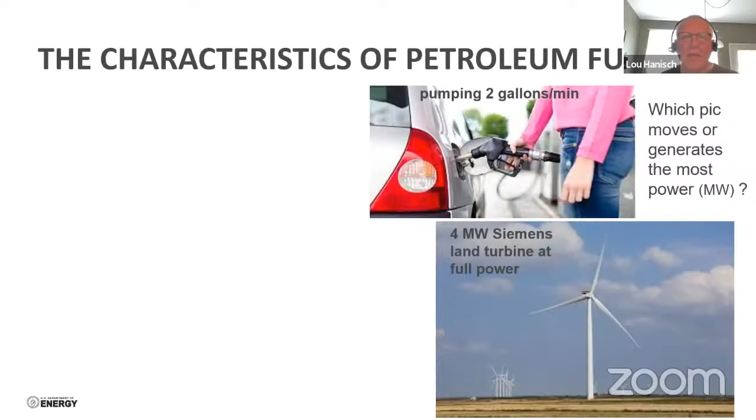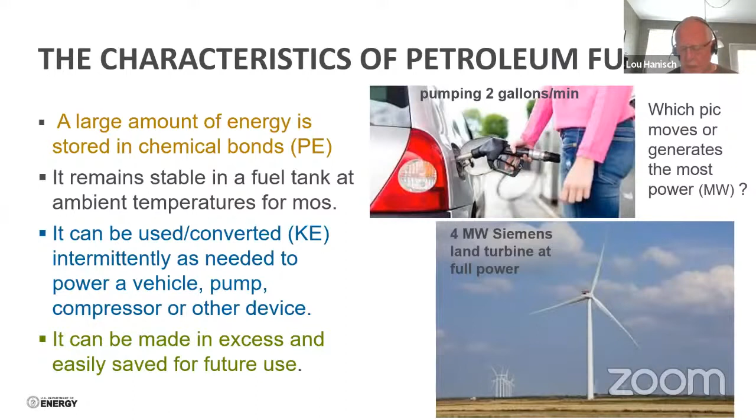The reason I was interested in this talk is that we're all getting pretty familiar with small batteries in our cell phones and various things around the house. They're very practical, generally pretty safe, not very expensive. But big batteries for intermittent energy are a challenge because to have sustained energy stored for a period of time, given our fascination with wind and solar, it would require fairly expensive and novel technology to provide this energy over time. I think Lou has covered that complex subject very well in what I've seen from his handouts.

And that would be the woman. She's well over, she's like at 4.4 megawatts of power that's actually moving from the gas tank underground to her car. Now that's a slow pump. I mean, you could almost double that rate, so she could be almost double the power of this big land wind turbine that you see.

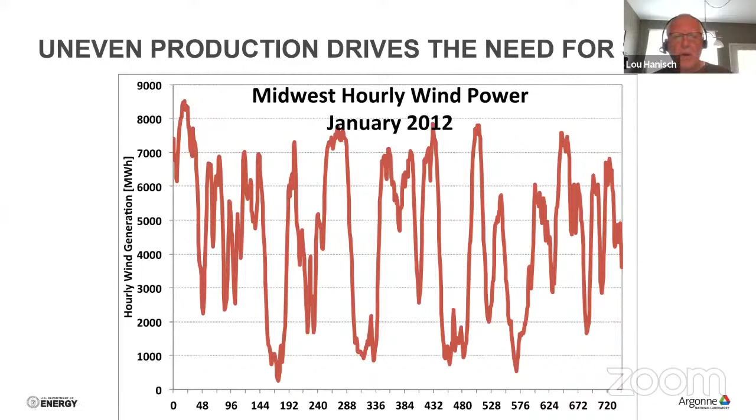So what that tells us is petroleum really spoiled us. It gives us a tremendous amount of energy. We can store it. It's stable. It doesn't disappear on us. And we can convert it intermittently to the power that we need in whatever we want to run, if it's a vehicle, a pump, compressor, some other device. And we can make it in excess, okay, and store it. It really has its own built-in energy storage.

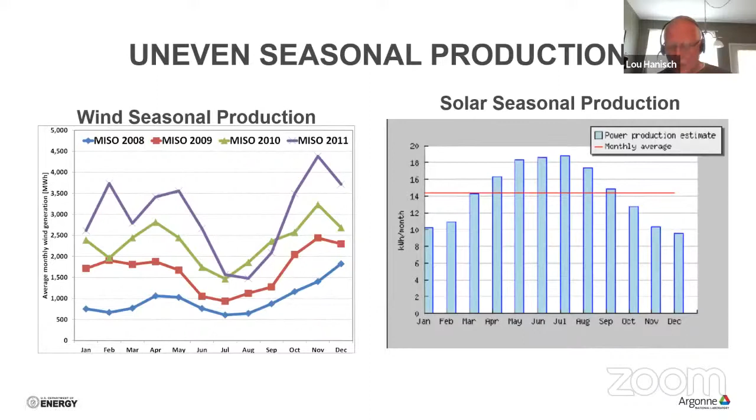The big thing we have to remember, and we've heard this in many other presentations, is that the electrical system works by supply and demand, production and consumption, and it has to match every moment. You cannot have one out of sync from the other. It just doesn't work. It's remarkable that you flip on a switch and somehow we fire up some device at home and it stays in sync. It's just remarkable how the grid operators make that work. And we're doing it without very much stored electricity. We're just somehow making it work. It seems magical.

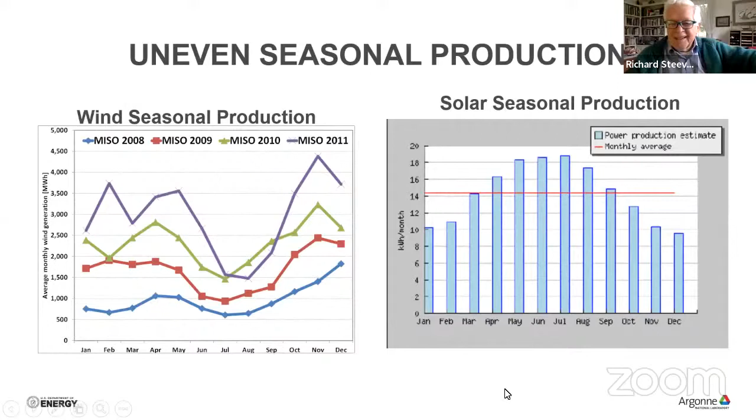But as Richard indicated, as you start to bring in renewable energy, this gets a little more dicey. It's harder to do. We want to stretch this timeline, and we want to energize these electrons. Can we put them in a bottle, so to speak, like a genie in the bottle? Well, in one form of storage, you can do that, but that's not what I'm going to talk about.

Supercapacitors can do that, but they don't really help very much. They don't have very much energy, and they have a lot of downsides, but you will see a little bit about those. The one thing that we have to do is the second bullet, and that's we want to take a variety of technologies that collect energy or electricity at one point in time, change it to some form that we can store, and then change it back to electricity later when it's most valuable. And this is key, when it's most valuable. Every time you have an energy conversion, you will lose some of that energy. Laws of thermodynamics. So you're going to have two of these every time you're trying to go through a cycle, a minimum of two, when you want to store energy.

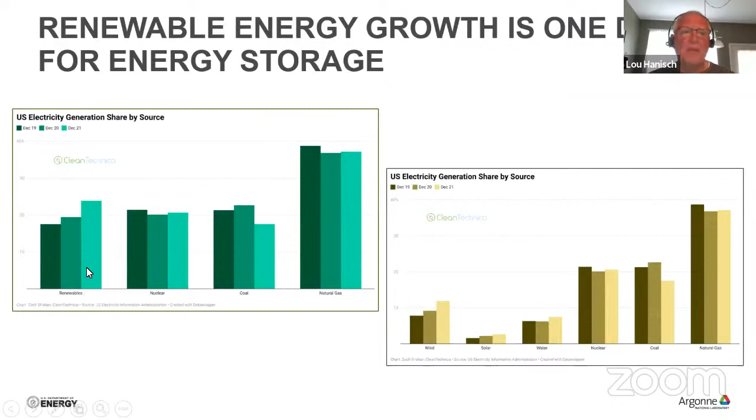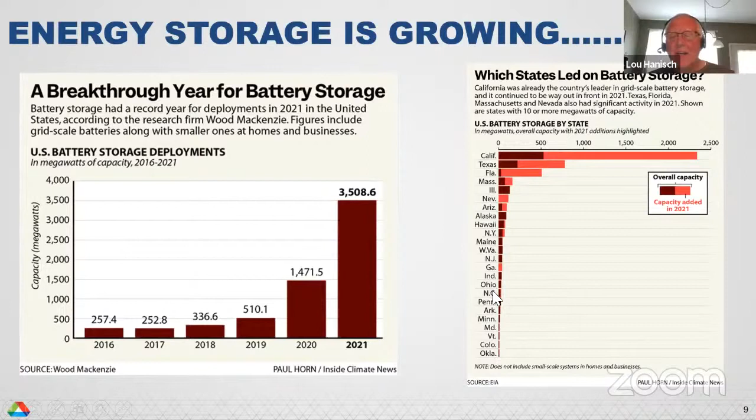Here's another graph just to show you the growth of renewables quickly.

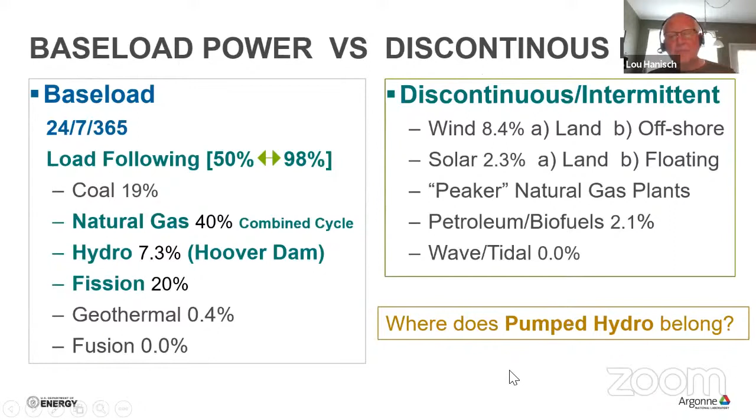Well, anyway, it's showing the erratic... There was a raised hand. I just want to make sure you gentlemen saw that somebody has a question in the chat. Oh, very good point, thank you, I sometimes overlook that. Let's see what Bill... oh, he asked what is MISO, and I just defined it, so that's okay. Okay, very good, stands for Midwest - I've forgotten what it stands for. I'm glad you knew that because I didn't know that. All right, okay.

But anyway, it's in the middle of the country, and it's a huge grid. It excludes only Texas, which is the windiest state, they say, but they've got their own special grid.

Okay, we're just showing this is December of 2021. This green graph is very recent, just a few months old, but it's showing renewables growing. Actually, renewables include hydro. So if you stack all three up, it will equal this, and the remaining ones stay the same on the other graph. Anyway, it is growing, and that's just what's happening. I'm just mentioning that.

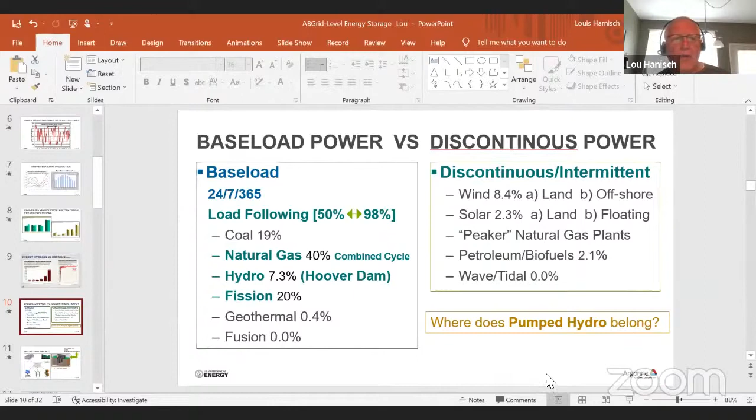Battery storage, look, that's growing too. And this is all forms of batteries, from residential up to grid bulk level. They went up in the last three years before this year, 7-fold. So this stuff is growing like crazy, and where it'll be in 2022, it'll be way up there, and who knows where.

This graph on this side, if you can see it, the red is showing the capacity that was added just in the last year. California, Texas, Florida, they're way up there. They should be up there. Nevada should be up there. But this is not including residential or commercial, it's just including utility and bulk level, or grid level.

I don't see Wisconsin on here. Where is it? I'm not seeing it. All right, this will change too.

Okay, now here's a graph that you guys all know. I'm going to just mention a couple of things about this, so that we are on the same page. On this left side, we have base load, 24/7, 365. It does not necessarily mean it's full power all the time, that gets into load following, and I want to park this one for a while. These percentages are percents in the US that are pretty current. Fission has held 20% for quite a while, actually. Coal should be decreasing, natural gas has probably picked up and taken up the coal.

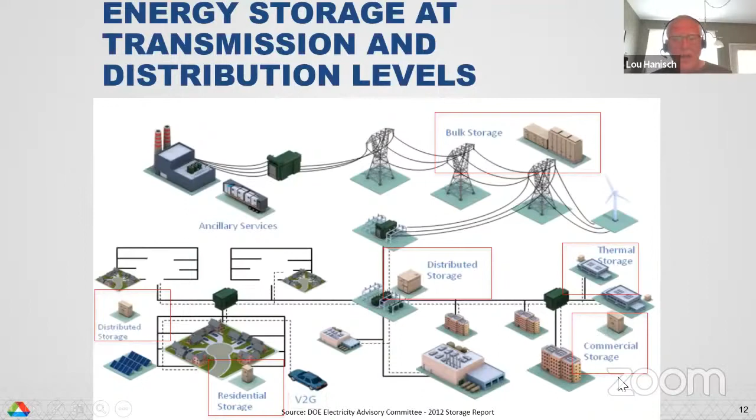What you just said applies very much to Hawaii. Hawaii has been using diesel generation for the longest time because they don't have very much solar, they're not interested in looking at offshore wind, and there's no projection for them to get modular fission reactors anytime soon. But I hope somebody convinces them, because that would be a natural for Hawaii. They need it.

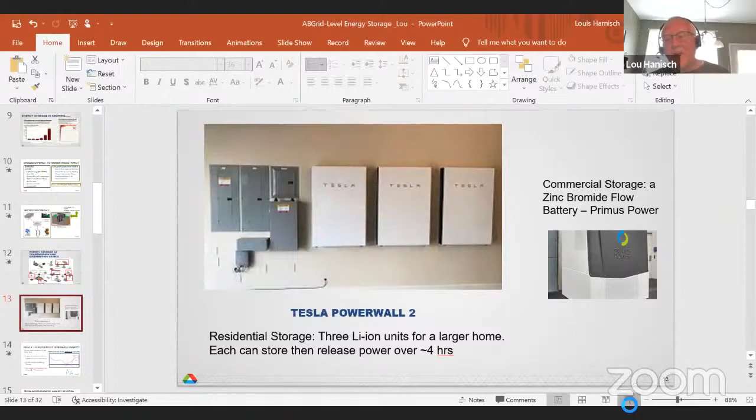I'm going to move up to the next slide, which is larger. We have a coal plant, and this plant is about on its last leg, so we're going to replace it with a Natrium reactor—that's happening in Wyoming. We have a substation that's going to change current for voltage and send energy down transmission lines.

And we have, I don't know if you can see, a windmill, that's renewable energy. Then we have another substation which changes the energy into a form that these users—whether it's a factory, hospital, or big box stores—can use, and they can put solar on their roof. And then we have a residential community here.

Okay, so this is sort of a larger grid in a microcosm. You'd need many of these to make up a full grid. But what's interesting is...

There are all these levels of storage that can occur here. Usually bulk or grid level is where you make the energy, whether it's renewable or sometimes even fission, or gas—they'll have a big facility, it's huge. Then we go into utility level here, which provides some backup, for maybe hospitals and other important facilities, government.

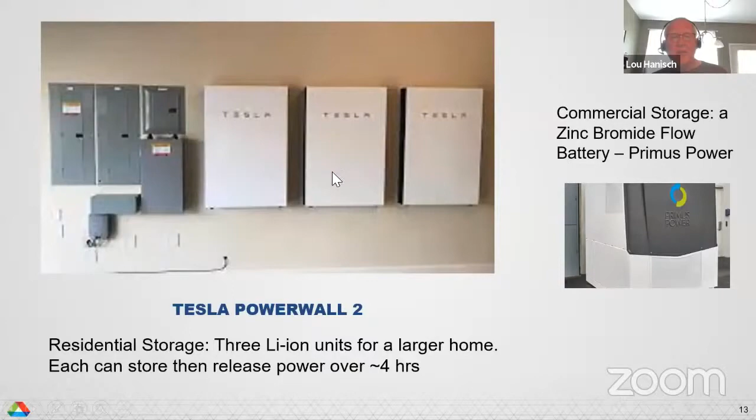Sorry to be barging in with the questions, but why would you have to have so much storage if the grid itself is functioning? It's not true storage, you're right, but it seems to me the main reason for bulk storage in this kind of system would be where people want to use energy at off times—they pay less for electricity in the middle of the night or on weekends. I'm wondering if that's why you have so many opportunities for storage on this slide. Is it financial?

Well, I think so, and that's true—you'd have off-peak energy that they can tap, and that's true for here too. That's my next slide, to talk about what this is. But here you have these big buildings—why not have rooftop solar on them? It's a footprint that could be utilized. Absolutely.

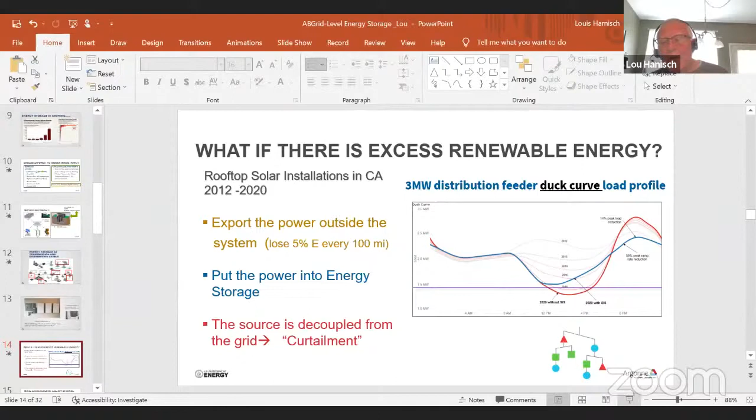Okay, so for residential power, these are Powerwall 2s. They're lithium ion, they can discharge for about 4 hours. This home has 3—it's a large home. But what's kind of neat about having 3 is, for peak periods, you could kick this one on first, an hour later kick this one on, and an hour later kick this one on, and you could stretch your peak period out if you needed to, or provide more energy during that time to run more things, either way.

This one over here is zinc bromide, Primus Power—it's a commercial unit, a flow battery. This is lithium ion, this is flow. They're not the same, but they would only last for about 4 hours each one, okay? And that's it, that's all they're gonna run.

All right, so now we want to get into the duck curve, and this has been brought up before. There's a great short video on this, about 3 minutes, that explains everything I'm going to explain, maybe even better. But basically, this is like a small area in California, maybe a county or two, where California had incentives to put rooftop solar up back around 2010 or soon after Obama was elected. They started putting more and more up each year in these areas, and you've got this curve of time of day on the x-axis, and the power required on the y-axis, and what this did is it just lowered the red curve that you see here.

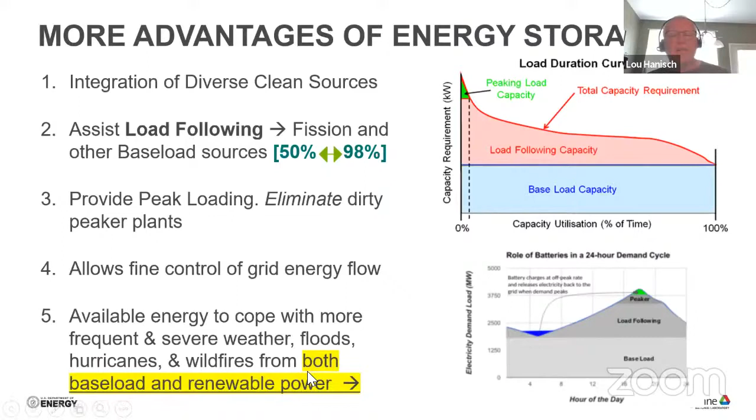So in essence, this is what the duck curve looks like. Hopefully that makes sense, that storage really helped out with this curve. I'm going to refer back to this again in just a little bit, but I'm going to move on.

Let's get my slide presentation going. There's a great video on the duck curve. You should watch it. It does a great job, although it pushes renewables a little too much.

So we covered this first item somewhat, integrating renewables into the grid. This second one is called load following, and that's where you have some of your base load plants working at 100% or 98%, whatever. Then you have a subset of your base load plants cutting back their power a little bit, probably to accommodate renewables, but to also balance things.

What happens with load following, and I don't know what percentage this would be—these graphs may not be reflecting how much load following actually occurs with certain power plants—but I like this graph in some ways better because it shows storage happening here, and when you have storage here, you're reducing the amount of load following. It minimizes load following.

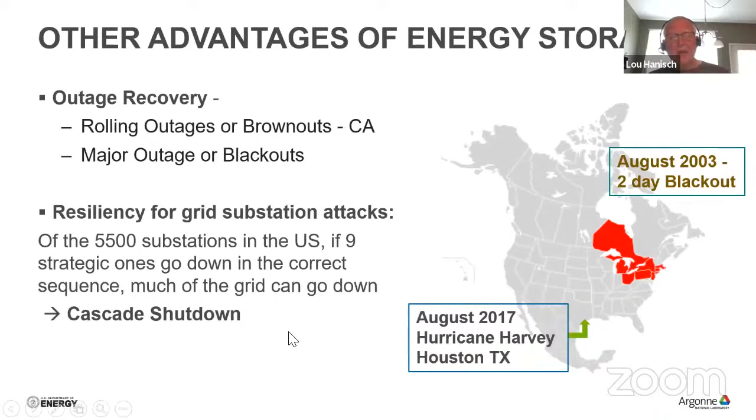I'm going to back up, and with that concept in mind, let's go back to the duck curve. See, there was no load following here. And because of energy storage in the blue line, we eliminated curtailment. Curtailment didn't occur. But if there wasn't this much storage going on, load following would have to dip or else you'd have curtailment, and that renewable solar energy would just go to waste. It would be decoupled.

Okay, so the other thing that makes a lot of sense is number 4: with energy storage, you have a lot of ability to just fine tune the grid. You can pull from a battery here or there that are complex and make things work a lot easier. Hopefully that's very intuitive, I would think. I'm not going to say too much more about that.

Number 5 is really important because this is going on now. We need to have available energy in a distributed way, not just at a power plant. When the power lines are down, that doesn't do you any good. You need it distributed, so you need those different levels of storage to help deal with all the severe weather we've been having—tornadoes, hurricanes, you name it.

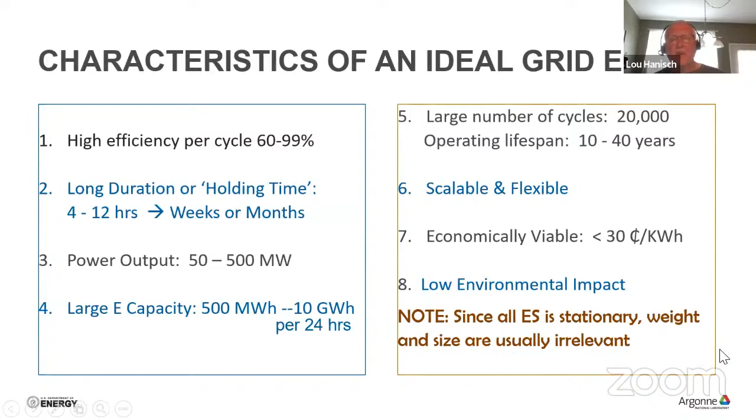Just to illustrate, if you don't do it, you have brownouts or blackouts, right? California's had plenty of those, but we had a really big blackout in 2003 in the New York and Toronto area. That was a software issue that screwed up—it was a couple of limbs that hit a power line that shouldn't have done anything, and it cascaded out of control because the software didn't work.

Think about August of 2017, Hurricane Harvey dumped 60 inches of rain in Southeast Texas. Guess what else is out there besides a lot of people - chemical plants, refineries, all of these things. They couldn't finish some of their processes, so they're releasing plumes of toxic materials. They just didn't have enough stored energy right near the plant to pump out water, to finish things up, so they wouldn't have these premature releases. This is important - there's a lot of ramifications with not having the power you need when you need it.

Then this last thing was a 60 Minutes piece. There's 5,500 substations in the US. If 9 strategic ones go out, much of the grid could go down. This was in 60 Minutes about 7 weeks ago - some expert made this statement. I don't know how correct it is, but we do know some of the substations have been attacked, shot at, and different things. And of course, software could be another way to attack them.

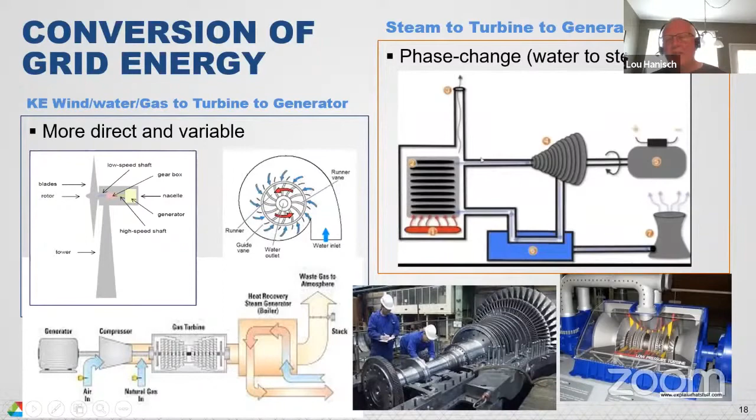This is a ballpark output that you might need, and you could have multiples to extend this. This is energy capacity in gigawatt hours, over a 24-hour period. These are, again, ballpark things. So when you get them big, the larger facilities would be in this area. Smaller ones, like commercial, would be even below this maybe.

Cycles - 20,000 cycles at least, and lifespan 10 to 40 years. Lithium ion only lasts 10 years. That's it, and it's done.

Scalable, flexible - you can make multiples of a lot of these things to scale them up. Viable - there's 2 types of economics: one to install the technology, and the other to run it, operate it. This is more operational, like less than 30 cents per kilowatt hour. If it gets more than that, it's kind of pointless. I've heard some as low as 5 cents per kilowatt hour for storage. We'll see how that plays out.

And then a low environmental impact. We know that pumped hydro is not that - that's one of the faults of pumped hydro, unless there's a natural lake or something somewhere. So weight and size are irrelevant when you have stationary energy storage. You don't have to worry about it like you do on a vehicle.

Okay, so we'll sort of tie into some of these. This is a real busy slide - I'm not going to spend much time on this.

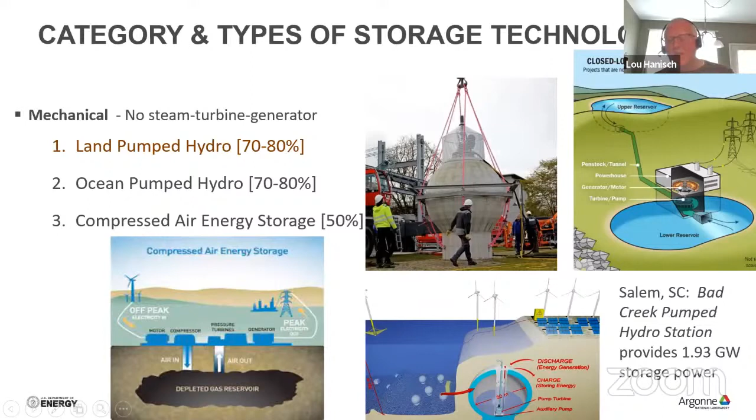Well, it doesn't get much publicity either. Yeah, if Steve hadn't brought that to our attention, who would know about it? I think there's a big facility in West Virginia too — I've come across that, but that's in the Appalachian Mountains. You've got mountainous areas that are perfect for that kind of thing.

Okay, ocean pumped hydro. Again, with these devices, first of all you need offshore wind or coastal wind and excess energy that they can put into these chambers. The chambers are made out of reinforced concrete, they have a turbine or pump on top, and they're sunk about 700 meters down. For every 10 meters, the atmospheric pressure increases a whole atmosphere — I don't know what that unit is in, but roughly every 30 feet — so 10 meters would be about that. You're increasing the pressure by putting these down on a shelf and anchoring them.

So that makes the turbine spin that much faster, or longer, however you want to regulate it, by sinking them down. That's how these pan out. I don't know, we'll see — this is just a concept that's out there. But they have to be connected to the turbines, and there's a lot of wiring that has to be done and so forth.

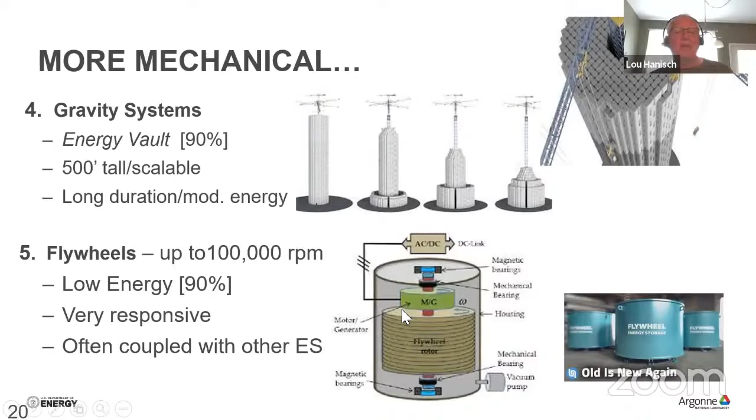The other one is compressed air storage — you have to have an underground reservoir that doesn't leak, and you can just pump air in under pressure with pistons. That creates heat. If you can take that heat away, hold it, and bring it back when you want to release the air, adding that heat back to the air, it's going to make it more efficient.

And vice versa. If I press this button on my computer keyboard duster, this gets really cold really quick. You can get frostbite. When you let air expand, cold is generated, and if you can bring that cold to the other side, it makes everything more efficient. So this is about maybe 50% compressed air, but it's a huge area and could contain a lot of energy stored.

The other thing one of the videos on the sheet covers is water done the same way. They find fracking reservoirs that are tight and pump water under pressure, then bring the water back out. So that functions pretty much like pumped hydro, but you're going into the ground, going downward, not upward. You're reversing everything. There is a video on that, I think it's from Texas somewhere, Quidnet.

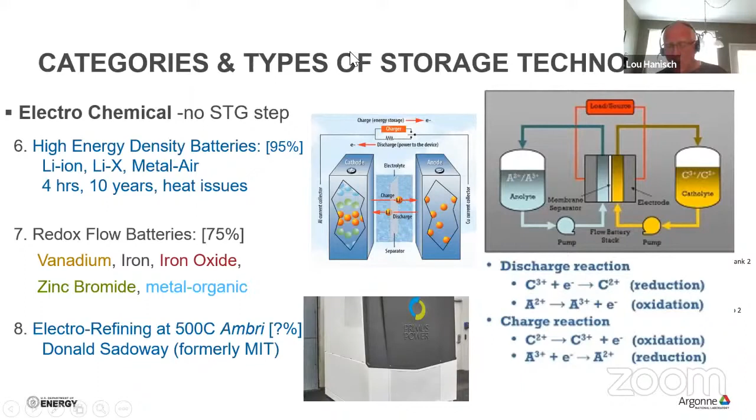Lee is the ideal person to comment on this, but I noticed when I compared driving an electric vehicle, pure electric, with a hybrid, that I feel much more drag when I take my foot off the accelerator. So much drag that if you anticipate a red light with any caution at all, you end up not using your brakes because you're harvesting that mechanical energy back into the battery, and you can see your battery charging as you're slowing down. You don't get that quite so much in a hybrid vehicle because there's not as much regen. They don't need it so much, perhaps. But sometime we could get Lee to talk to us more about the pure electric vehicle.

We hear a good bit of criticism in Wisconsin that hybrids are just as good as electric vehicles because our electricity is so dirty. But I think Lee could make a point that most pure electric vehicles today have a very nice regen feature, and it fits perfectly with your diagram of the lithium-ion battery. Right, and I have a hybrid, and I don't see it braking, slowing down as much as you're saying. Yep, and so anyway, that's an interesting sidebar.

So basically, there are issues with mining lithium and all that - I don't want to get into that. There's some environmental concerns with cobalt, and they may get rid of cobalt and nickel in these cathodes at some point. Who knows? You just don't know where it's going to go.

Redox flow batteries take the battery inside out. The electrolyte here becomes huge, and that's where the energy is stored. We do still have this chamber where the two electrodes exist, and ions move back and forth. But the storage is really in the anolyte and catholyte, the electrolytes, and they can be scaled way up, and they're much cheaper. Vanadium is one of the big ones now, but it's getting in short supply.

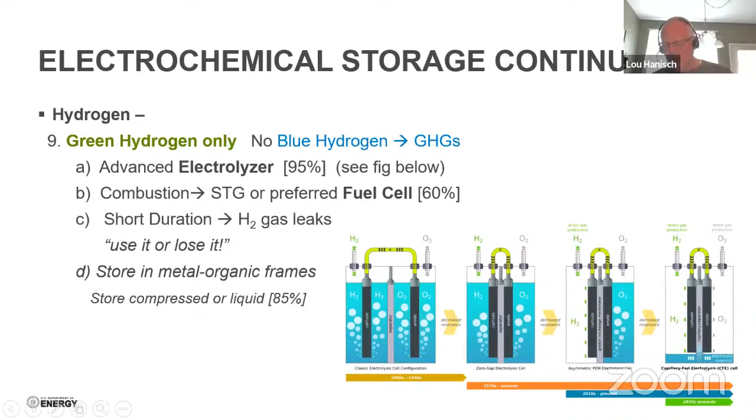I know Argonne's been doing some work on metal-organic frameworks, trying to find polymers that work with metals and so forth to extend the battery efficiency or whatever, and make them cheaper. But anyway, I'm not going to go through these reactions - if you get my slides, you can look at them or find this on the internet.

Then this last one is electro refining. This is a company called Ambri. The problem is you've got to keep the temperature in all phases at 500 degrees Celsius - that's a lot of heat that has to be applied all the time. And this guy you'll see all over the videos, Don Sadoway. He's interesting, but I'm not sure - I don't hear this taking off anywhere. Maybe it will, we'll see.

So there's one more electrochemical one, and that is hydrogen. This one is getting legs - green hydrogen is going berserk from what I'm seeing. They have a new electrolyzer over here. This is the kind of electrolysis our teachers would show us in school, maybe with an upside-down electrode of carbon or something with a test tube. But these have advanced, and there's some structure in here, a capillary structure that makes this work so well. Anyway, the electrolyzers have gotten better.

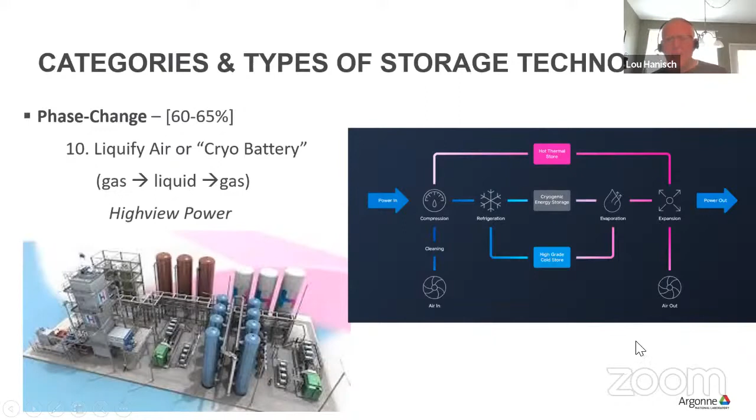Fuel cells are really the preferred way to harvest, to turn the energy from hydrogen back into electricity. You could use steam turbine generation if you want, but this would be a lot easier. And this isn't combustion - there's no combustion here, so combustion only applies to this. And then you've got to store the gas, and hydrogen loves to leak. Believe me, it moves so fast at ambient temperatures that it finds any little thing it can leak through.

I think the problem is if you compress it, there's an energy penalty, and if you liquefy it, there's an even greater energy penalty. If you liquefy it, you only have about 85% of it left, something on that order. You still have to use it up. It's hard to store for these filling stations - if you put it on a vehicle, I don't know how those filling stations are going to work, because with compressed liquid gases, they have to vent or they'll explode the container they're stored in.

Now, I want to say one more thing about this. This is the reason why there have been vehicles that have been hydrogen powered - Honda made one, Hyundai made one. And they just will never compete with lithium ion.

Here's why: you lose 5% at this point, you lose 40% here, and you're going to lose some in storage. You're going to lose half your energy trying to power a vehicle. Why not just power it with lithium ion batteries? You're only losing 5% at all, that's tops. And here you're losing 50%, 10 times. What this might work for is aviation someday, because aviation can't handle the weight of lithium ion. It just can't handle that weight.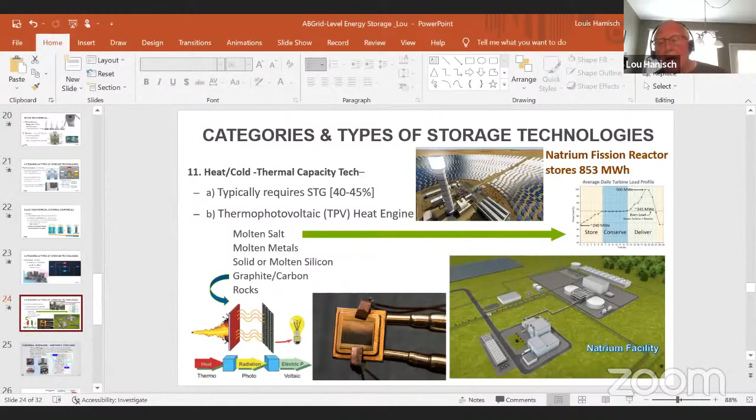STG, this is concentrated solar energy. These are all mirrors, and they shine light up to the top of this tower where there's molten salt. The salt melts and holds a lot of energy, and then at an off-peak time, we can run this through a steam turbine generator, which is down here. Problem is, this facility has died - it's not efficient. There were two, one made in Spain and one made someplace else. None of them are working anymore. There's something wrong, inherently wrong with them, and maybe somebody knows what that is, but it is the concept that I'm trying to illustrate.

What actually works better is what the Natrium reactor does. It takes some of the core energy, the heat, through exchangers and melts molten salt and then makes that available. There's a key slide up here that I can't quite see, but maybe I can see it this way. Not sure I can do that either. It shows there's a bump up here, and you'll see it when you have the slides.

Unfortunately these are covering them up. But down here, it seems to be load following, and then when you get to this bump on the graph, it does actually add the energy back into the steam turbine generation. So it's for peak power - it can be very flexible. This reactor is quite flexible.

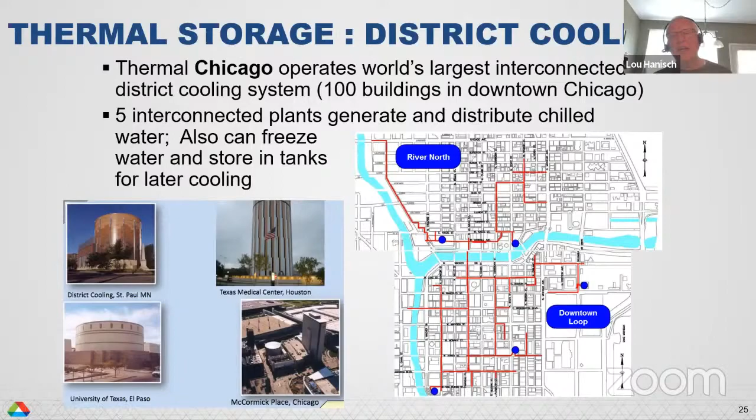So that takes care of that. The other thing that's very interesting with heat is you can store it in graphite blocks, which are basically carbon, and it stores quite a bit of heat for quite a long time.

This is diagrammatic. It shows the heat and a metal plate, and when you get it hot enough, it radiates high energy photons over to this thermophotovoltaic heat engine. It's a cell, a centimeter by a centimeter. Just recently they've gotten this to work really well at 40% efficiency, and then it creates electricity directly to go on the grid. But you've got to have these blocks really hot, and I'm not sure how that all works.

How hot is really hot, do you know? Somewhere between 1900 C and 2400 C, that's 4,300 degrees Fahrenheit. Yeah, that's why he's using sodium, liquid sodium, because you're getting up there with those temperatures. That would be interesting to see how this would work with the natrium. But actually, they were using graphite in the video. You'll see the graphite, but maybe they can do it with some of these other things too.

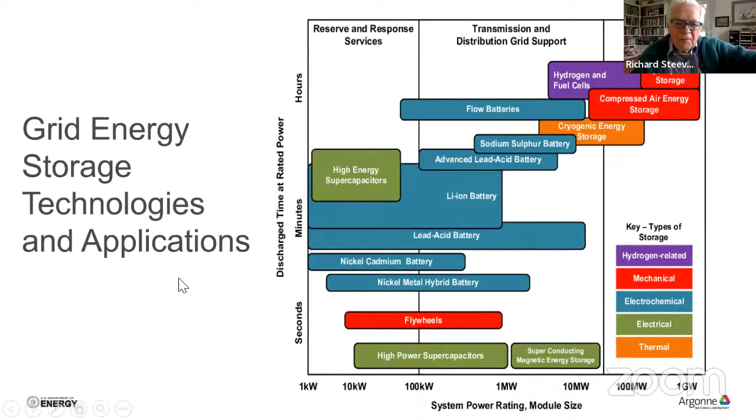I'm not sure. So this has to be scaled way up to like the surface area of a quarter of a football field. It's got to go way up, and they think they can do it. We'll see how that works. We shall see.

We talked about heat. The other thing is cold, and something that you've got to get my slide thing going. Thank you. Yeah, there are downtown Chicago, there's thermal storage in the form of cooling going on.

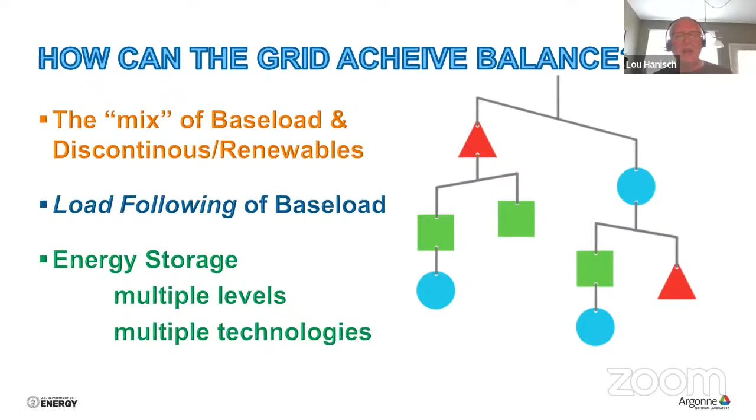There's these 5 plants, shown as blue dots, that will chill water down during off-peak energy and hold a lot of that cool water or slurry, and deliver it to at least 100 buildings downtown. So that's a form of storage, not as advanced as the stuff we just covered with heat, but it's a very simple system. You probably didn't know about this. McCormick Place is cooled that way, and many other buildings too—I don't know what all the other buildings are, but it's kind of a way to save energy.

Question: how does this save energy? Are we talking about using heat pumps in reverse, or are we talking about using it directly in air conditioning in the summertime? It's not clear, probably not using heat pumps that I'm aware of. It's probably just using standard refrigeration.

My guess is it's all off peak, because then they have big reservoirs of this, which keep it from warming up very quickly. Would that be substituting for air conditioning then in big business offices directly? I think some of the buildings are probably set up that way, yeah, for AC. If you multiply 100 buildings plus all that energy, that should make a difference, you would think. Other places are doing this district cooling as well. I'm just introducing this—it's kind of the flip side of the heat, just to show you.

So basically, this is my summary slide. We've got a lot of things up here—you may have to grab the slide somewhere, we're getting blocked. Hydrogen is showing just fine. We can see the whole picture. You can, okay, I just can't, I don't see it. Okay, so anyway, you're getting the one thing.

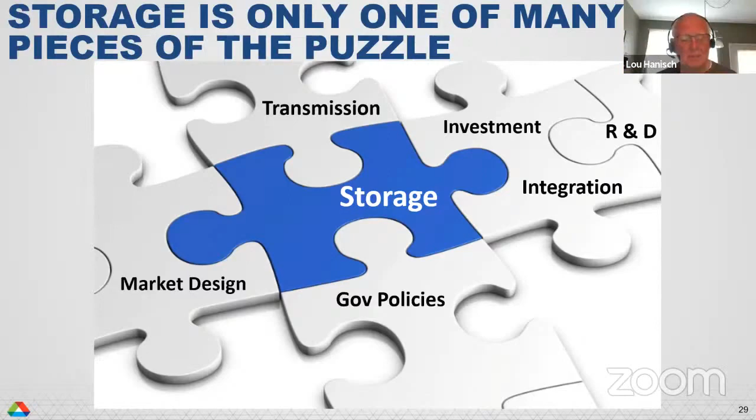purifying the so-called nuclear waste that we keep calling waste and isn't waste at all. They're simply fission products, and how we could purify those rather than bury them someplace. Many of them are very useful medically in both therapy and medical diagnostics. And so we could analyze a little bit what's in the waste.

And I was thinking of reviewing a book called How to Drive a Nuclear Reactor, written by Colin Tucker from England, who describes how safe and how self-regulating nuclear reactors are, and you can literally take them for a drive. It shows on the front cover a guy with a steering wheel, and in the center, where you normally have a hub, he has an atom. So the idea is how to handle it.

We think of nuclear reactors as something off in outer space or something that's bound to have green goo flowing from it. Forgotten the name of that cartoon guy. Somebody help me. Dilbert? No, not Dilbert. Dilbert was good, he had humor. The guy with the green goo, he ran a nuclear plant, and he behaved like an imbecile. But anyway, he's helped to formulate a lot of anti-nuclear prejudice.